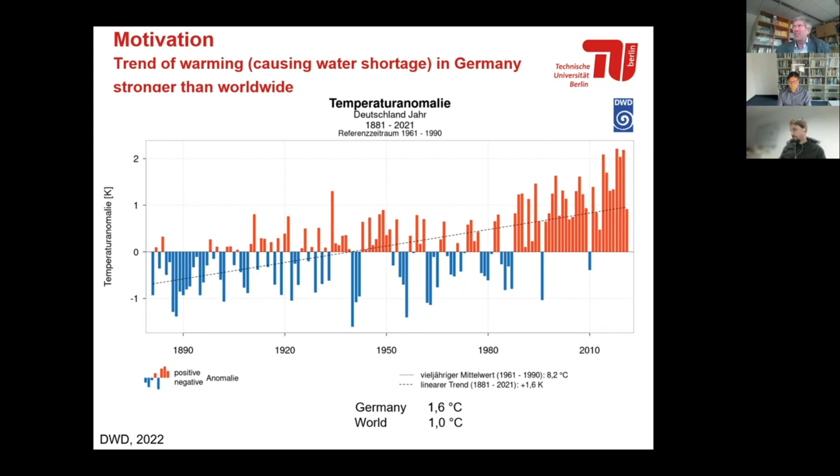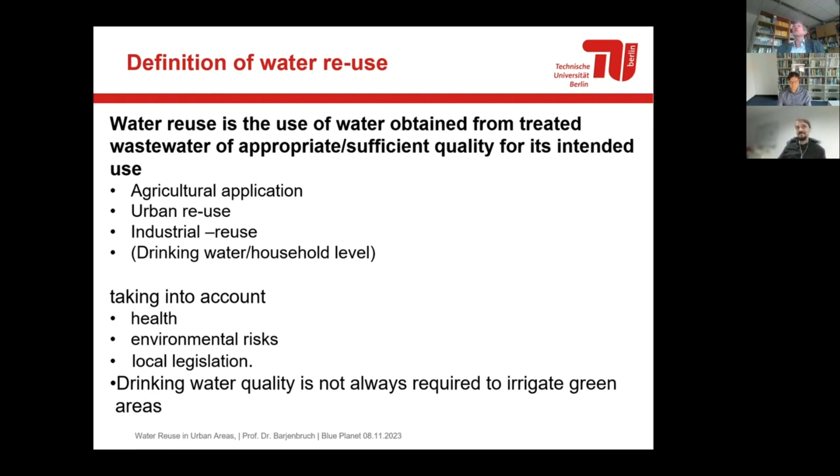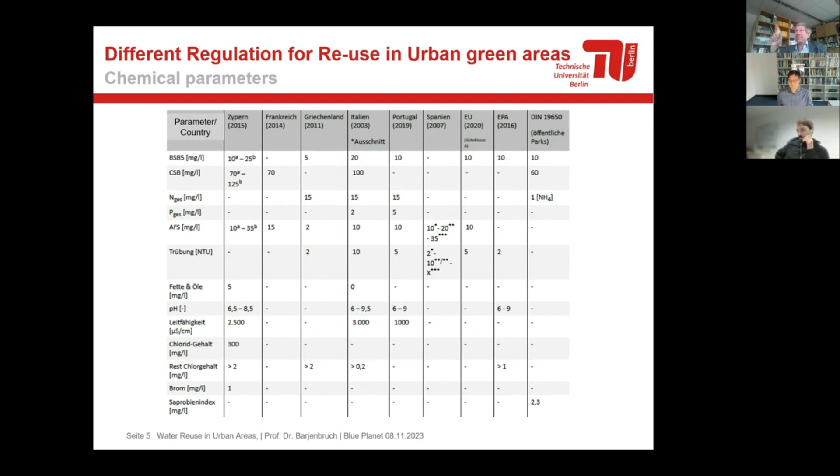Then you can reuse this water. The average German effluent value of all wastewater treatment plants is 26, just without any additional treatment. So we can go ahead.

The spoken word is valid. That's for true. So it doesn't matter what is written on the slides. So now you can see my slide.

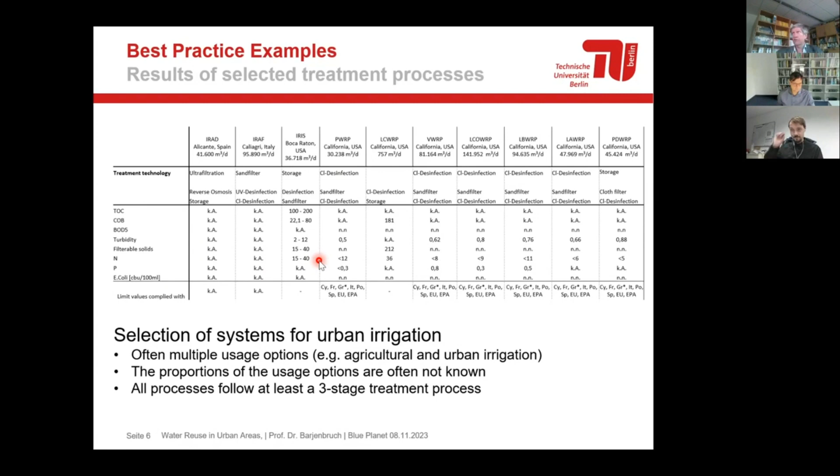There's a selection of systems for urban irrigation, and you can see nearly all apply a sand filtration with a disinfection. And we have a long time of experience in that. Here you can see the COD again, 22 to 80 is the average value. You can also see the nitrogen, which can also be used as a fertilizer for agricultural land, but also for urban land.

So I have taken here some examples which I had several years ago when I visited Australia. You can see here the flowers, which are irrigated with wastewater. Also tomatoes, no problems, can grow, and also Christmas trees, of course, will grow.

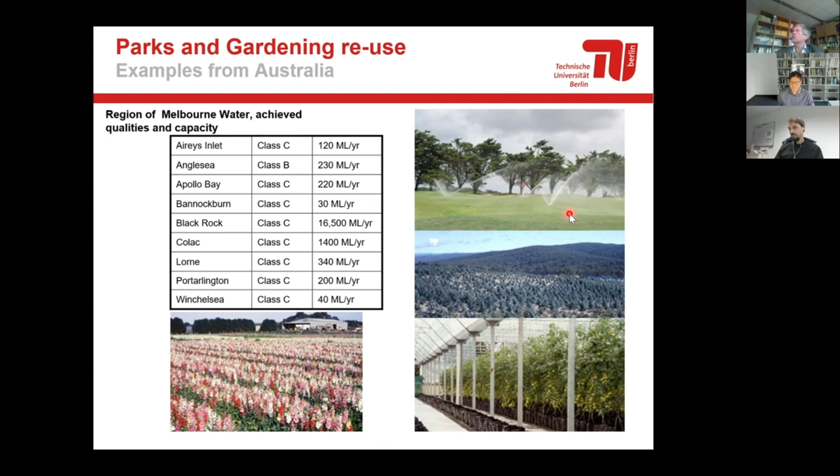And golf places. Unfortunately, I haven't caught the kangaroos, which also like this water and this green on the golf places. So maybe the best practice results show up. Urban reuse has been a stable and successful application for several decades already. Always 3-stage treatment in the wastewater, subsequently a sand filtration, and the disinfection is applied.

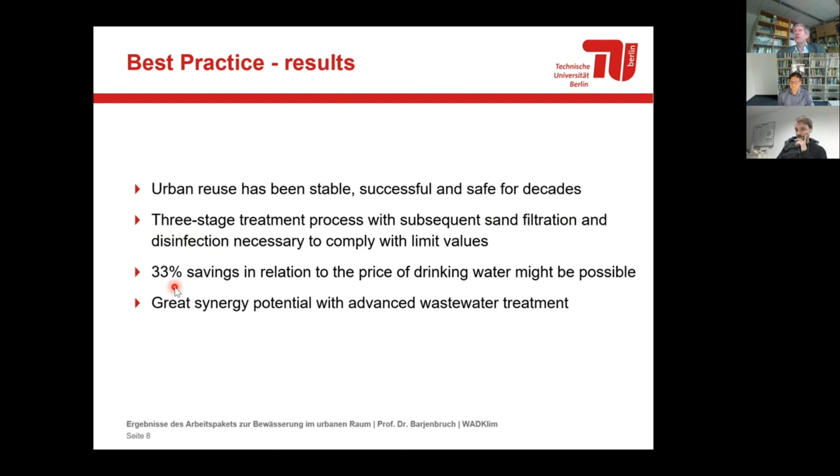We have also looked at the prices. So the price of the treated water is maybe 60% of the drinking water price. So we have also savings if we apply treated water. And we have also a synergy when we need advanced wastewater treatment. So for Germany, we looked, as I mentioned, at the trend on the temperature and the trend on

the water availability. We looked at what is possible, what is needed for the water demand for the urban green. So the needed amount of irrigation water for the urban green. And there we looked at the urban areas. Unfortunately, there is no real statistic about that. So we calculated 5 different approaches. Also, we don't know what kind of green grows on this urban area. So we took grassland and we calculated the climatic water balance.

And you can see here, normal years, we calculated from 1916 up to 2020, and dry years, these are the 12 driest years in this period, and the very dry year is 2018. 2018 is the driest year we had in this period. And then we differentiated between large cities, maybe larger than 100,000, middle cities and small cities. And you can see here, this is the maximum amount of water needed for irrigation if we have all the green areas in the cities.

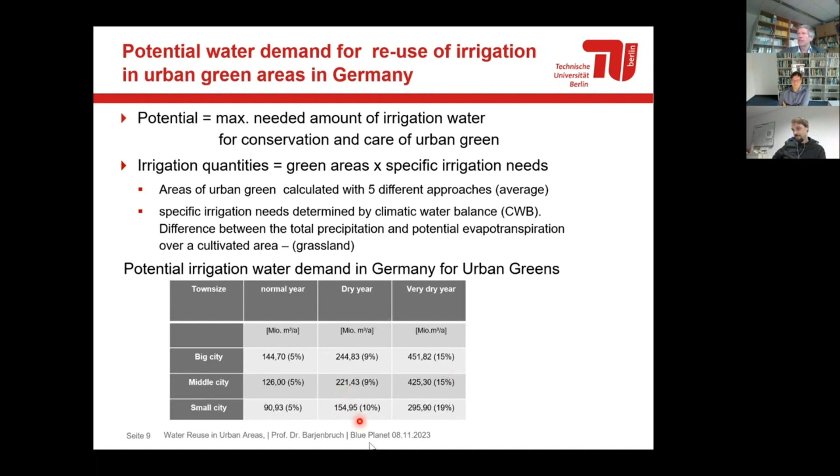And also we calculated the availability of wastewater. So there we need 15% of the wastewater. We have 9 billion cubic meters per year. So 15% of that would be needed when we have an irrigation of all the city greens. Otherwise we have to consider risk management. There is the European regulation for agricultural reuse, and reclaimed water has to be managed safely and not pose any risk for the environment, for humans, and also for animals.

We built up this risk management, also according to the EU regulations, specifically related to urban greens. And we made a 4-step approach: describe the entire water reuse system from the discharge point, so the wastewater treatment, also the industry which is connected to the wastewater treatment plant, up to the point of use. Then we have to consider all parties which are involved, the treatment plant, of course, maybe the distribution company, and also the green savers. And we have to describe the roles and responsibilities.

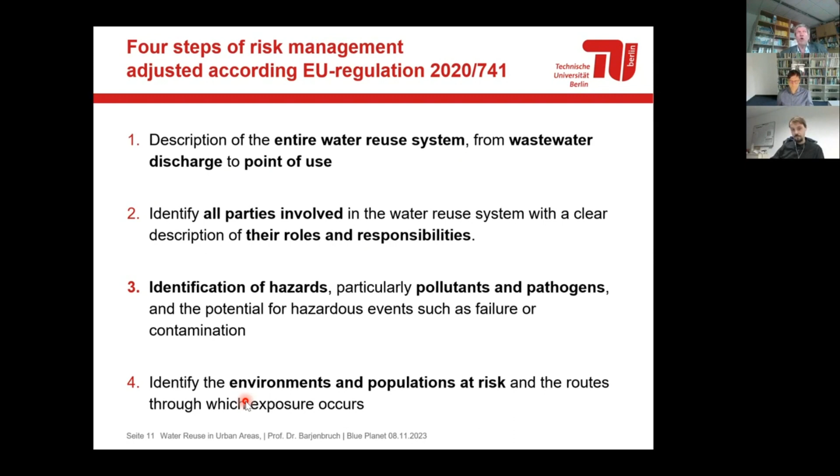We have to identify the hazards of pollutants and pathogens. And in the end, we have to consider the environmental risk, and also, of course, the risk to the people who will use the urban greens. And then we set up the boundary areas. You can see here, this is the wastewater from the households, from the industries. We have to look at the composition of the wastewater. We have to consider the advanced treatment; disinfection and sand filter are always recommended. And then also who will use the urban green, maybe only people from the green authority, also public, and maybe only sportsmen.

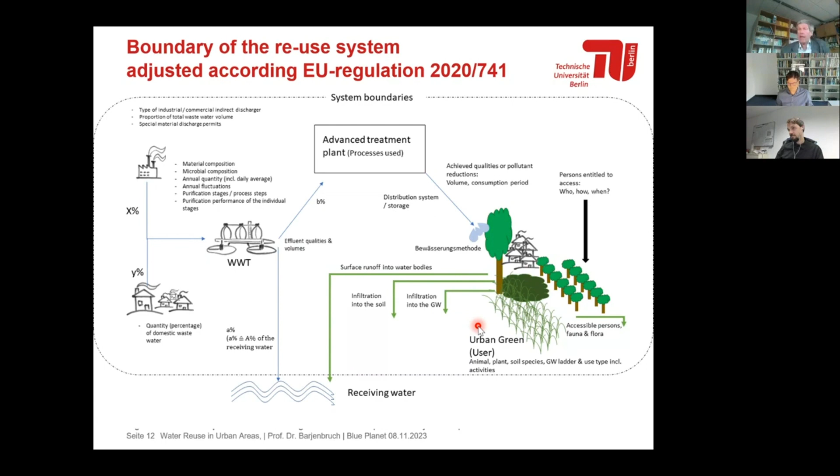And also we have to consider when and how is the use. And then we have to distinguish between different greens. We also have to look at what happens when we irrigate too much, so that it infiltrates into the groundwater. We have to consider the quality of the groundwater, specifically also with the micropollutants and so on. And in the end, we can set up possible precautionary measures.

Access controls, for example, additional disinfection directly during the irrigation, also specific irrigation technologies, drip irrigation, and so on. Also, maybe adjusting the opening times, so just after irrigation it's forbidden, maybe waiting for several hours. The requirements for the urban green have to be considered. The slope, also maybe safety distances to neighbors. And in the end, we also have to set signs.

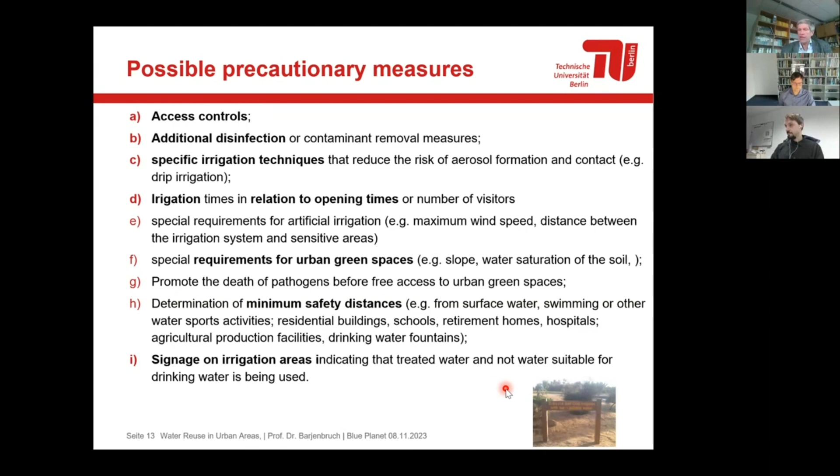Maybe here I have an example at a golf club. So this is not potable water, and you have to wonder when you jog or run there. Also, you have to be careful. So in the end, we made an example. What do we have to consider if we build up an urban irrigation system? So we have on the left-hand side a pipe system. This is a wastewater treatment plant. There's enough water available. And then we have a pipe system here.

We considered and made a rough planning of a pipe system, also a storage tank. And on the right-hand side, we have the road tree irrigation, which we suggested to do by trucks for the road trees. In the end, of course, this might be more expensive than drinking water, but we have a recycling of the water and we can improve this. And in the end, we have to think about whether we really want to supply water to all the urban greens.

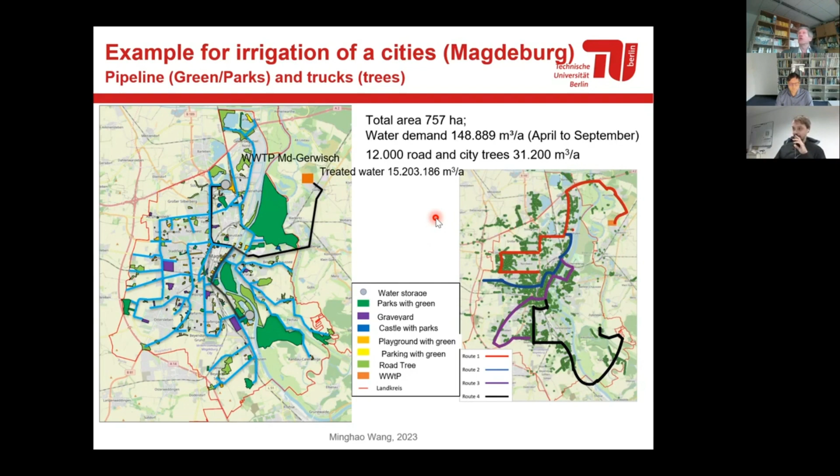Finally, we made a stakeholder survey, and I just took the graph of the results of the acceptance. We asked about the attitude: could you imagine using recycled water for urban purposes, of course with hygienic and health regulations regarded? And you can see here, 85% agreed with this. 85% would use recycled water. Of course, they need a certain threat, a lack of water, then they would use it.

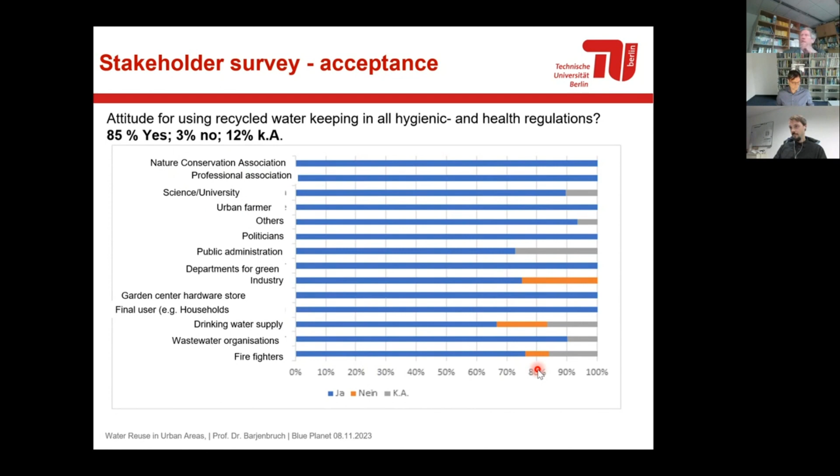We can see here the science has no regrets, but others, maybe the firefighters, have some remarks on that, and they have to be adjusted. So I just want to thank you for the attention, and please find partners who treat wastewater and who need to use it, and then we have to set up the rules in between and make good content. Thank you very much for the attention.

Thank you, Matthias Barjenbruch. It was a very interesting talk. You see people applauding. I know that our audio connection isn't that good, so I probably will not ask any question as Mr. Barjenbruch is already leaving the room. Maybe we come back to this later, because I have some questions for both speakers.

So now I will move on to our second speaker, Marcel Schneider. He is working for the Leibniz Institute for Plasma Science and Technology in Greifswald, where he's responsible for the topic of clean water, focusing on the application of plasma methods for the removal of pollutants. I already see the presentation, so Mr. Schneider, please start.

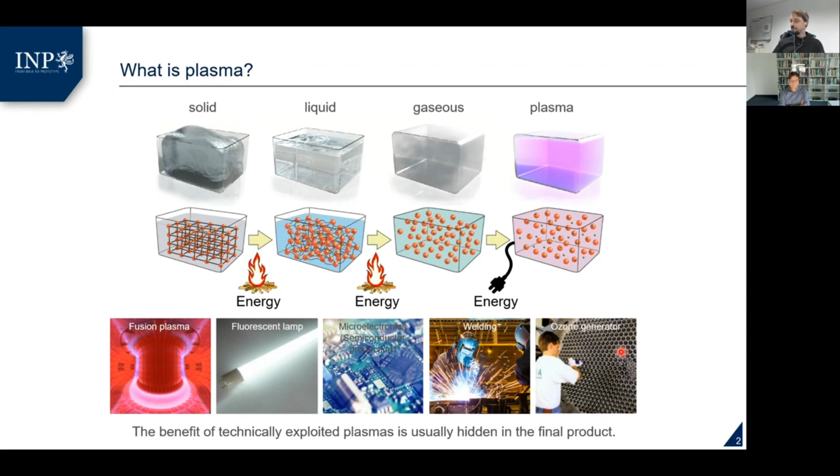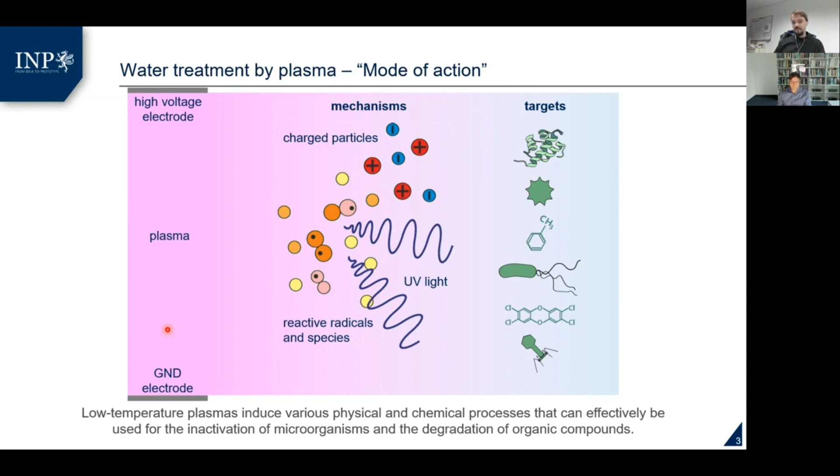To produce a plasma, we basically need a setup with two electrodes, these gray bars in this picture. If we supply a high voltage, an electric discharge will propagate between the two electrodes, producing the plasma and inducing various physical and chemical processes. These include the emission of light in the ultraviolet and visible spectrum, and various reactive chemical species. These processes can be exploited for water treatment to inactivate microorganisms and degrade organic compounds.

In the context of water treatment, plasma technology comes with a set of unique advantages. To produce the plasma, all you need is a plasma reactor, electricity, and in some cases a gas, usually air. Other than that, you don't need any chemicals, catalysts, or other additives. The plasma can inactivate microorganisms, including multi-resistant bacteria, and so far there is no evidence of microbial resistance developing against plasma treatment. The plasma can also degrade organic compounds, even those not susceptible to other advanced treatments.

Another huge advantage is that the plasma system can be adapted to specific situations and requirements. So depending on the discharge configuration and the operating medium, these physical and chemical processes I mentioned before can be controlled to some extent. And that makes the plasma technology quite versatile. And last but not least, plasma systems are usually quite easy to handle, and they allow for an on-demand operation. So you can easily turn the plasma system on and off as needed.

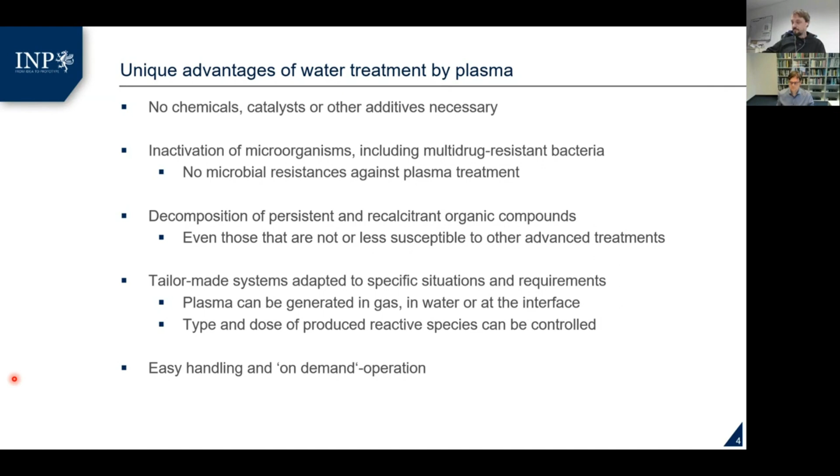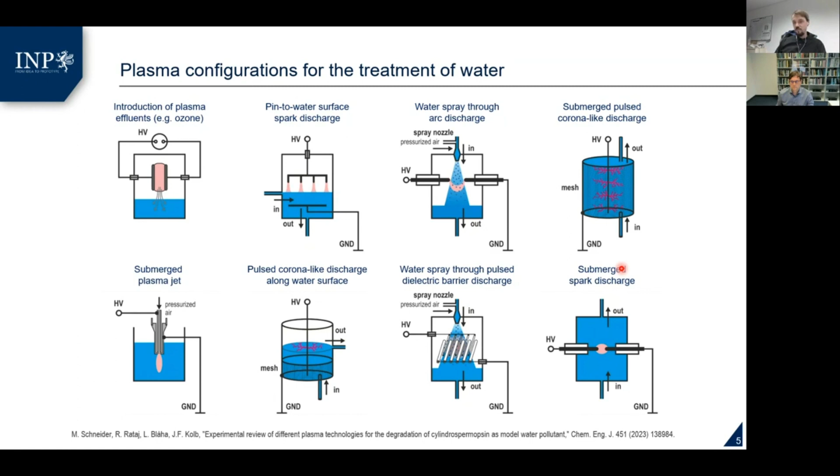And the third principle is then shown here on the right-hand side, the two examples. These are discharges submerged in water. And here we have, so to speak, the most immediate interaction of the plasma with the water and the contaminants in the water.

This topic of water treatment has been established about 10 to 12 years ago at the INP. And since then, we had a lot of different studies, a lot of different projects where we developed different plasma systems and used them for different applications. So on the next two slides, I'm going to just show a few highlights.

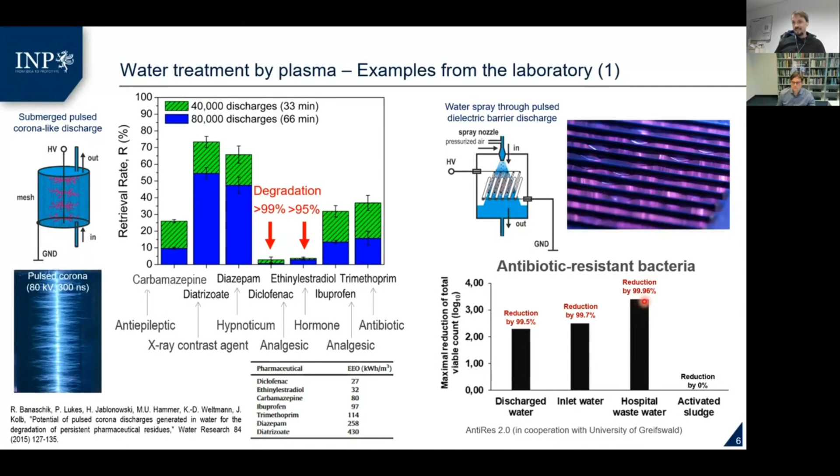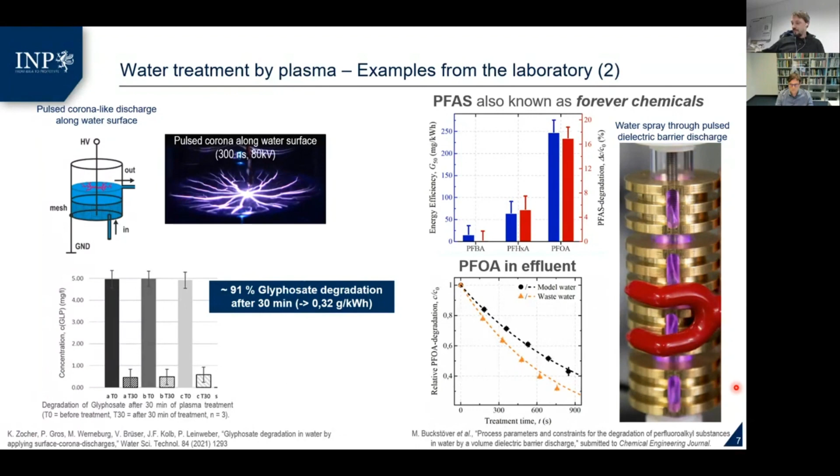Although we used real water matrices in some of these studies, they were still conducted under rather controlled environments and controlled conditions. So in a current project, which is called Physics for Environment, we then wanted to go one step further. So out from the laboratory and into the field and test the system under real life conditions.

The system is set up right now to treat up to 2 cubic meters of water per hour. And it's a modular setup, which basically allows us to adjust and change the order of the different treatment methods that are installed in the system. And with that, for each application, for each water matrix, we can find the best treatment option or the best order of treatments.

For the Physics for Environment project, the focus is mainly on treating water from agriculture and food industry. And the goal is to eliminate bacteria and chemical pollution, in particular pesticides. And basically, we want to treat the water and purify the water to an extent that it can actually be reused in the food industry. The results we've obtained so far indicate that plasma is competitive compared to, for example, ozonation. And the next steps are now basically further upscaling of the plasma systems.

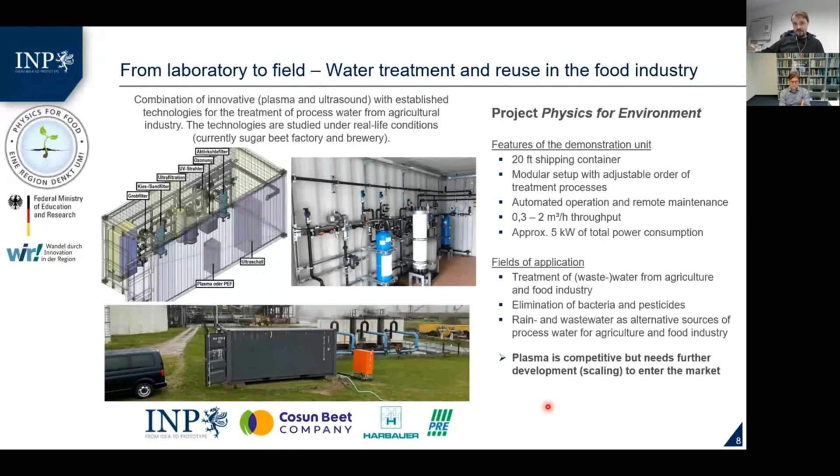And of course, water treatment in general is not our only goal. We're also looking into possible applications where the water is actually reused. We have currently a few projects where we look into that. One of the projects is the Physics for Environment project that focuses on the food industry. And we also have several projects that work on aquacultures, hydroponics, and vertical farming. And we are also about to initiate a project that focuses on the water reuse from laundries. So basically, the idea is to treat the water and then reuse it while it's still warm instead of heating up cold water again.

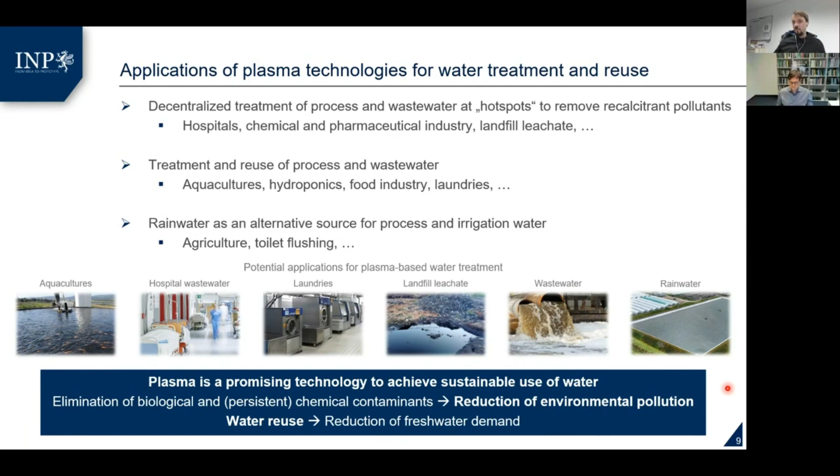And besides reusing process water and wastewater, we're also looking into using rainwater, for example, as an alternative source, in particular for irrigation in agriculture. So as a take-home message, I'd like to summarize that plasma is a promising technology that can help us in achieving sustainability in the water sector, in particular with regard to water treatment and reuse.